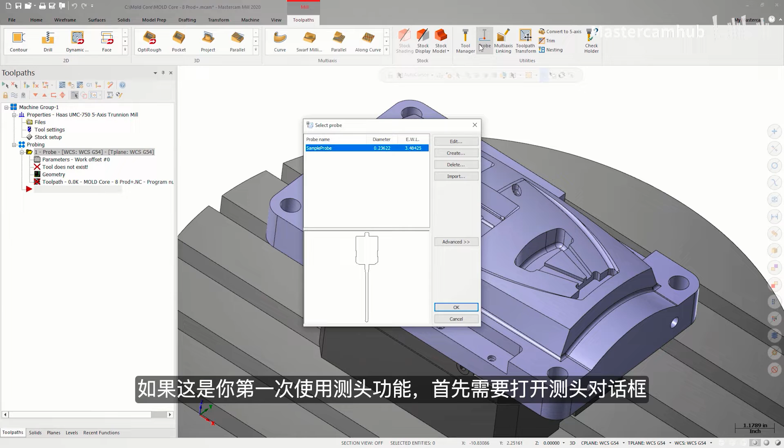We'll be using Productivity Plus, which is the probing add-in for Mastercam. It's located on the Toolpath tab under Utilities. If this is the first time you're creating a probing operation in a file, the Select Probe dialog will open. We'll edit the probe to match Tool 41 on our UMC 750 SS, which has a 40+1 capacity tool changer. Once the probe is configured, we can click OK and the probing dialog will open.

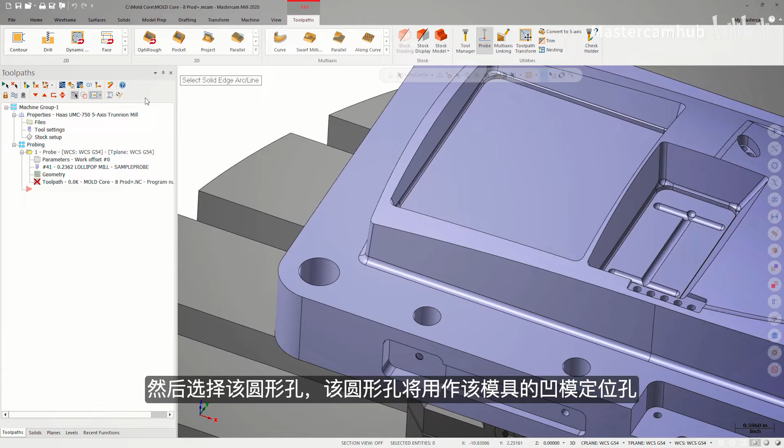Let's start with a macro 3-point operation and select this circular bore that will serve as a mating pin location for the female portion of this mold. We'll also select the smaller hole. Since all the like holes are being cut with the same process, selecting one of each should give us a good feel for the accuracy of the remaining hole sizes. At this point, we can end selection and probing will bring in all the information for the holes we selected.

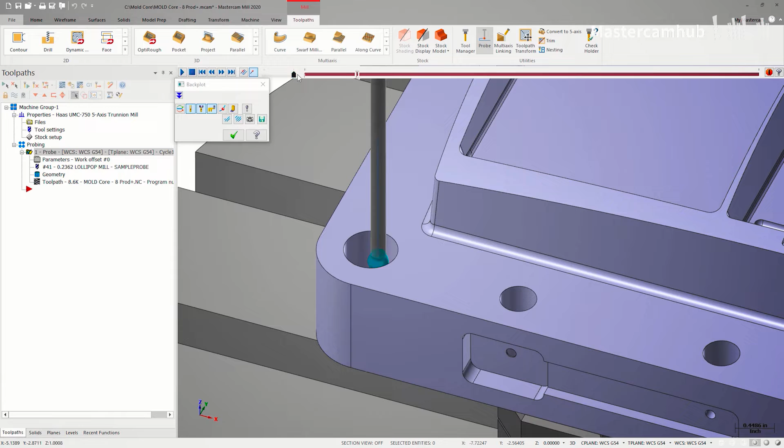If we save this probing operation and look at it in Backplot, we can see the motion that probing has created. Now we need to tell the probing routine what to do with the information it has gathered. Let's go back into the probing parameters and choose Machine Update. We'll tell probing to write to a machine macro variable. Any available variables can be used for this, but for this example, we'll use #800.

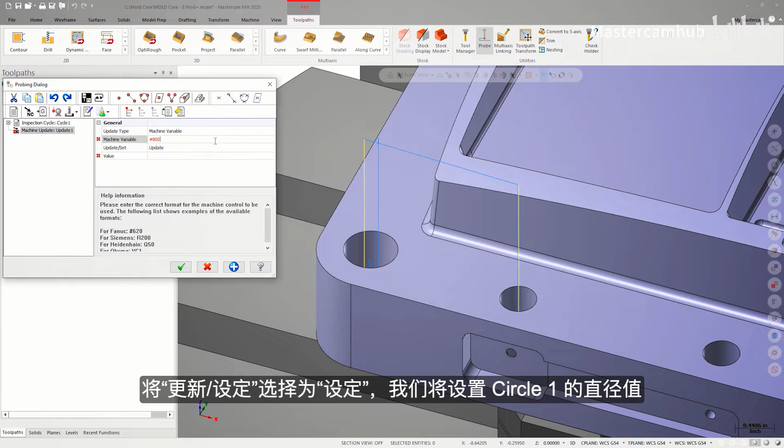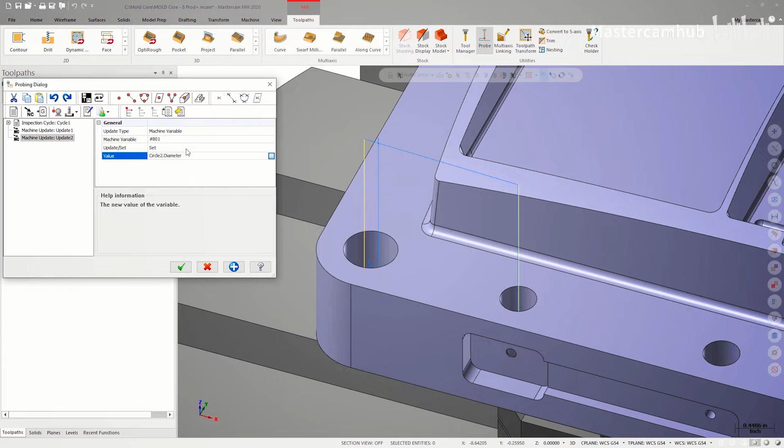Using the set strategy, we'll write the value of the diameter of circle 1. Next, we'll repeat that process for circle 2. This time, we'll use variable #801. Once the code is posted out, we can move over to the machine.

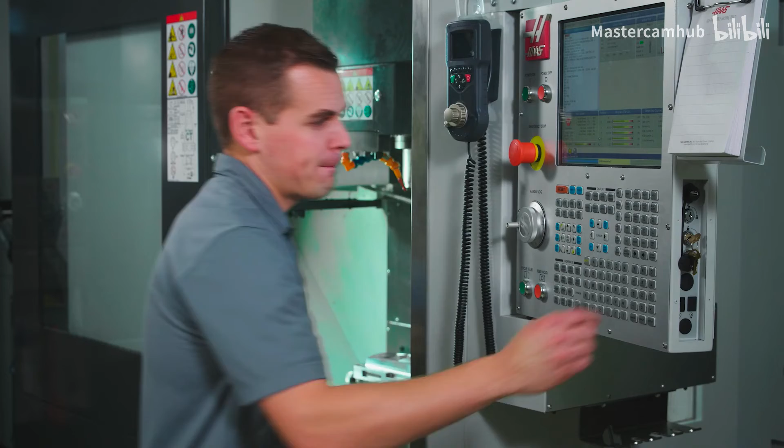As we saw on the model in Mastercam, we have two different sizes of hole that we'll be checking with the probe to provide some in-process feedback to the operator. If we run the probing routine, the values for these features will be written to the macros we chose, but they won't be displayed on the control by default. In order to make sure they're easily visible, we'll have to do a little setup.

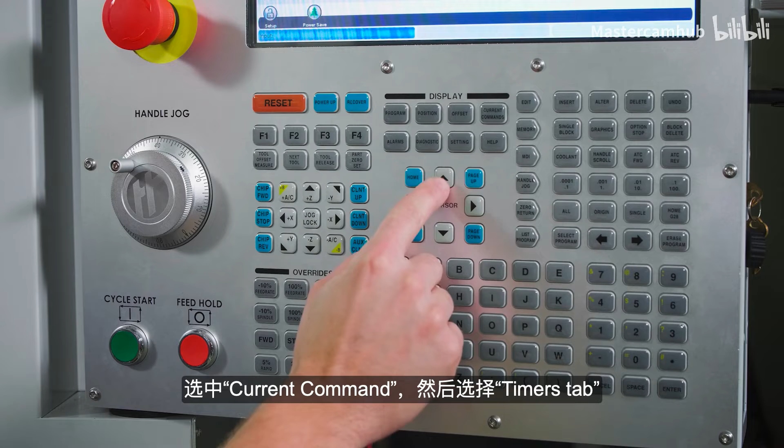Navigate to Current Commands, then move into the Timers tab. Here we'll see labels for Macro Variable 1, Macro Variable 2, and the Macro Assign fields. Since we wrote our diameters to #800 and #801 in Mastercam, we'll need to duplicate that in the control setup by entering these values under their respective Macro Assign fields.

Once this is done, we want to give the operator some labels in order to better understand what these values mean when they pop up on the control. I prefer to include the nominal value in the name, so let's call them .625 hole and .425 hole respectively. Since we haven't run the probing routine yet, the variables are displaying 0, which is their default value.

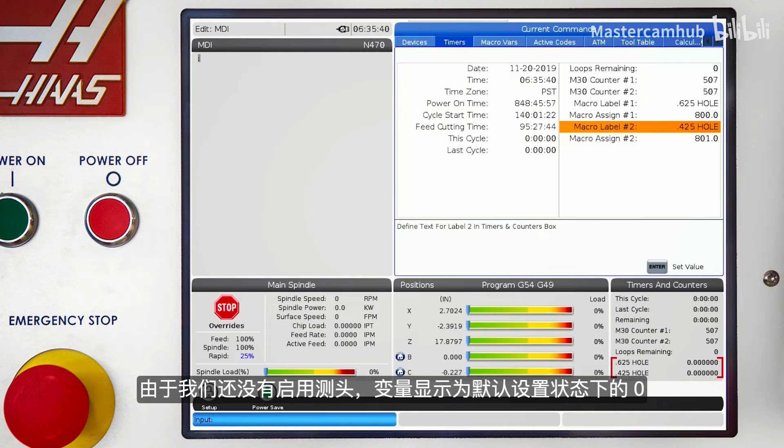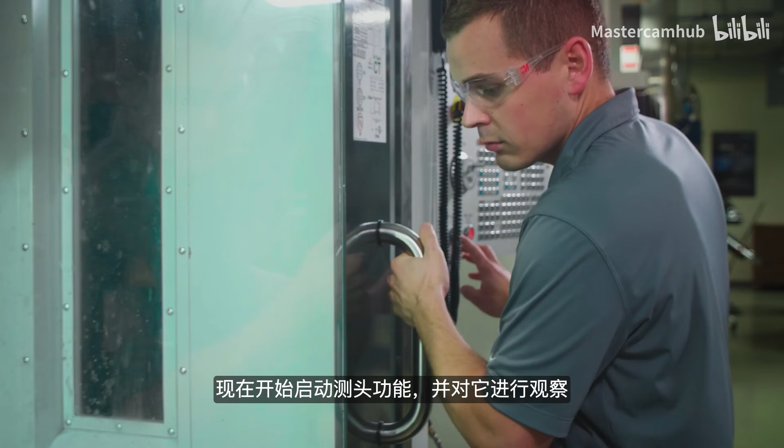Now that the controller is configured, let's load the posted probing routine. It's important to keep in mind that because Renishaw Productivity Plus leverages macro programming, we can't run the program directly off the USB drive. Instead, we'll copy it into memory before we run it. Let's hit Cycle Start and see this probing operation in action. You can see that the probe is behaving exactly as we simulated in Mastercam, measuring the large bore first, and then moving over to the smaller one.

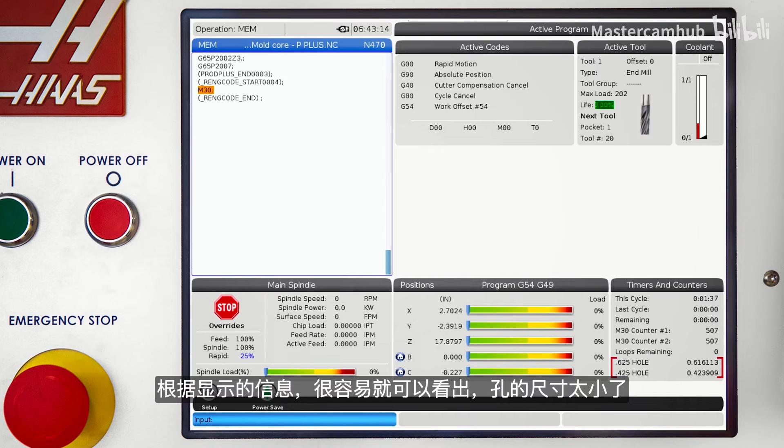Once the program is finished, the corresponding measurements from the probe are displayed with their labels, and it's easy to see that in this instance, the holes are slightly undersized. This means that the operator would know that they can make a wear adjustment if needed and rerun the boring operations to get those holes up to specification.

In Mastercam, it's also possible to create logic that would make tool compensation happen automatically off the probed measurements and then recut the holes. Productivity Plus is capable of much more than these simple probing routines as well. Tool breakage detection, automated workpiece setting, and autonomous logic are done in the same fashion. And these probing operations can be intertwined with regular machining to make for an intelligent and informative NC program.

We hope we've provided some insight into some of the technology that's available both inside Mastercam and your Haas CNC that can help you improve your quality and process control by leveraging tools you probably already have.